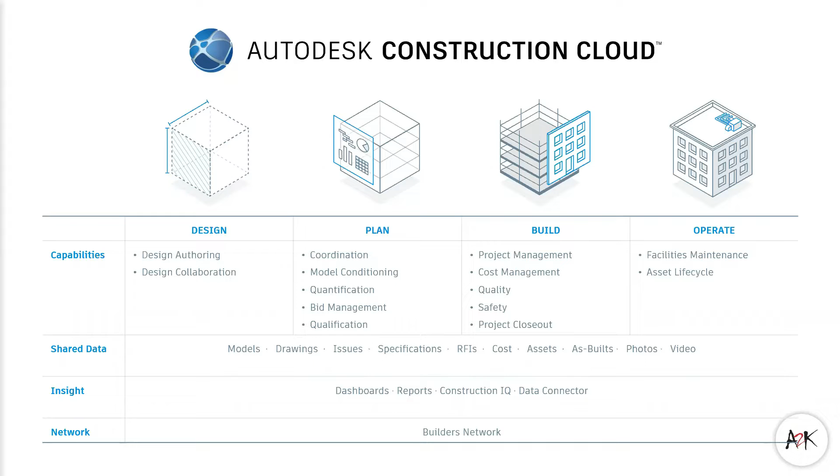Okay, so if we start talking about design collaboration and authoring, I want to touch on how design collaboration has been evolving, particularly as it pertains to Revit workflows. Initially, we started off with having Revit central models in our company shared drives, and users would just tap into that central model and work away. So they'd have one shared drive, the Revit central model was in that shared drive, and you'd have user 1, 2, and 3 tapping into that localized central model.

The problem with that was the limited amount of collaboration you had if you couldn't actually be in the office, or if you had to work with external consultants on bigger projects because you couldn't invite them into your shared drives, right?

Not only that, you had your daily manual BIM management tasks that could be automated if you had more of a collaborative platform. And there was also no internal activity tracking. You couldn't see what anyone was up to, and you didn't know when changes were happening in real time.

But then there was an evolution of what we call the Revit servers, where users could connect to a server within an organization that hosted Revit central models. So for larger organizations, this extended to multiple different servers across regions. So if you had a company that had different offices in different parts of Australia, you probably might have a different server for each office.

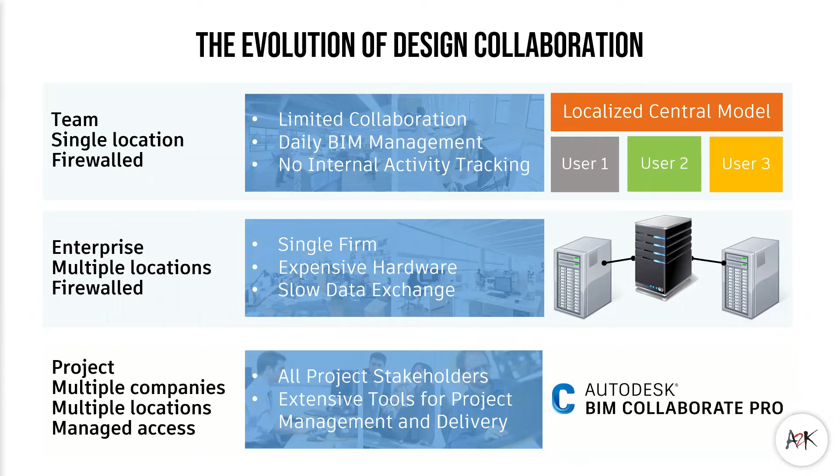And here's an extra slide for any of you who are around in the older days. There was a product available called BIM 360 Design, part of the BIM 360 portfolio of products. So this product actually allowed you to access the BIM 360 environment and use modules such as Revit Cloud Work Sharing, Collaboration for Civil 3D and Plant 3D, and BIM 360 Docs.

So this new product, the Autodesk BIM Collaborate Pro, is its successor, and it sits in the Autodesk Construction Cloud environment. So this new environment provides extra functionality such as clash detection, insight, and what we call Autodesk Docs now instead of BIM 360 Docs.

Please bear in mind, this is a unified platform, the Autodesk Construction Cloud, which means that your older BIM 360 projects and your new Autodesk Construction Cloud projects all sit in the same place, so it's nice and easy. I will show a visual example of this in the demo section of this webinar so that it makes a little bit more sense.

Again, just to summarize, BIM Collaborate Pro is the evolution of the older BIM 360 Design and sits on the Autodesk Construction Cloud platform, which gives it additional functionality. Also, if you have AEC collections, you actually now have access to Autodesk Docs within the Autodesk Construction Cloud, at least from a document management standpoint.

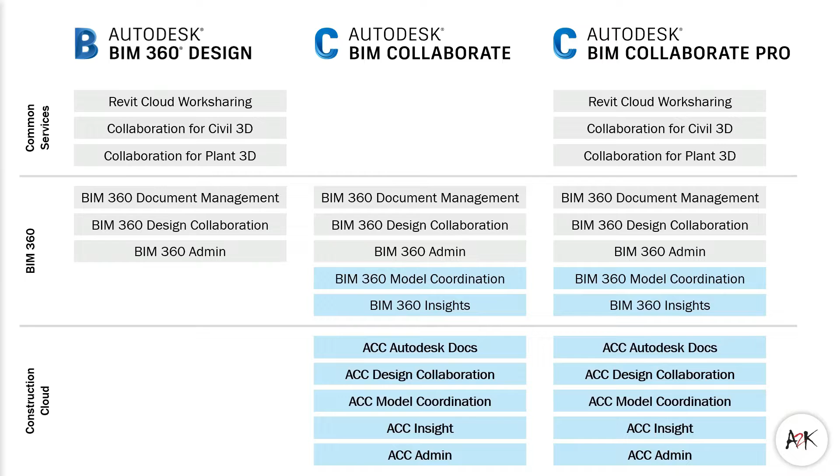Okay, just one more visual representation of what we're talking about, and it gives you a really good idea of what type of licensing you should have depending on you and your team's role.

So, basically, if you're a designer who's part of the design authoring process, then you need BIM Collaborate Pro. If you're just someone who's a reviewer, then perhaps the Autodesk BIM Collaborate license or Autodesk Docs will suit you just fine. Regardless, they're all connected within the Autodesk Construction Cloud platform.

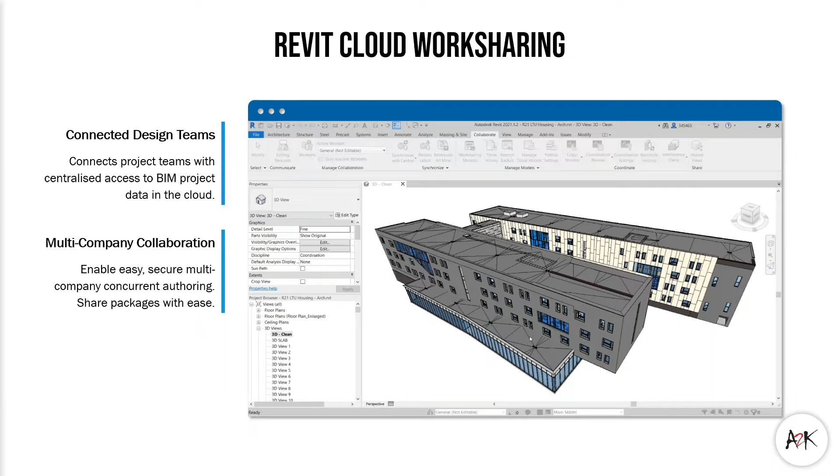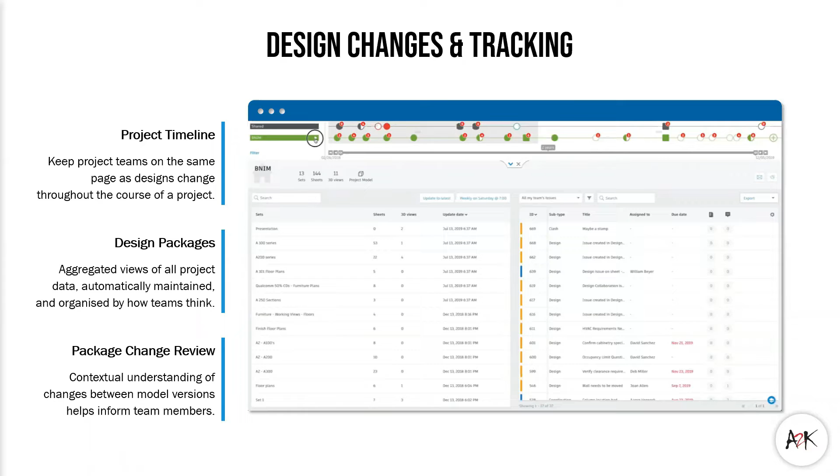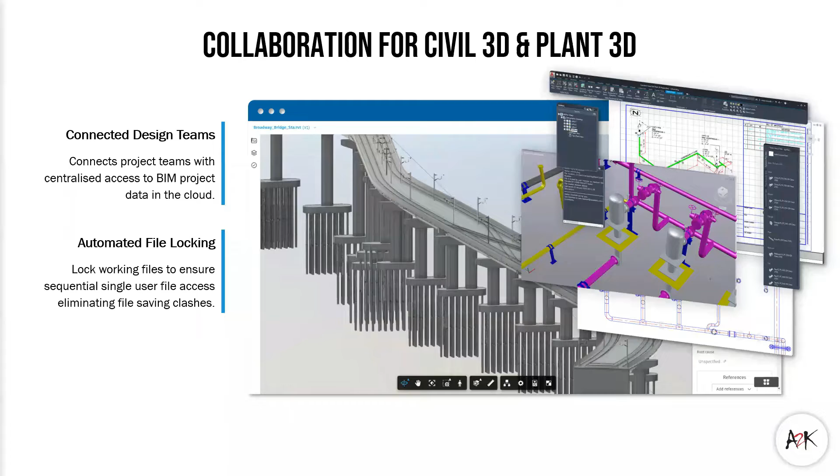Just so everyone's aware, there are collaboration options available for Civil 3D and Plant 3D within the Autodesk Construction Cloud. It's not just for Revit. We have done a webinar on how Civil 3D integrates with the Autodesk Construction Cloud and how that work sharing aspect comes together. So you can go on YouTube and check that out if you're interested in learning more, or get in touch with us at the end of this webinar.

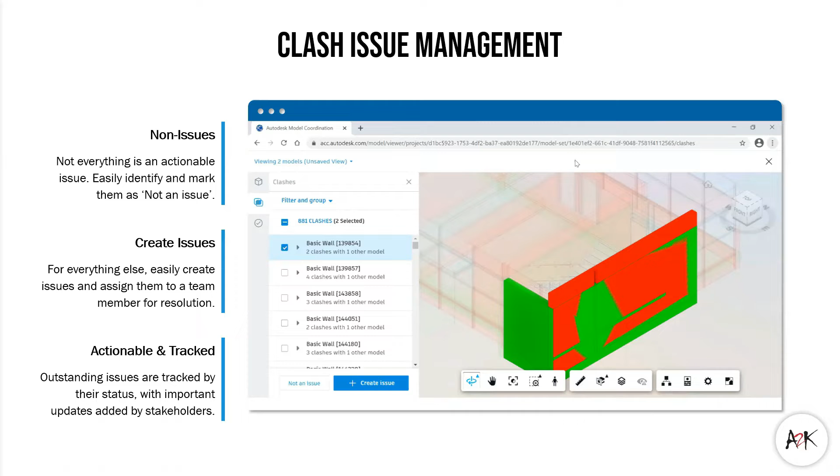Okay, cool. So now we can get into a live demonstration.

So I'm just going to bring up my Autodesk Construction Cloud environment. You can just use a web browser. This is a splash page for the Autodesk Construction Cloud, and over here you can see a list of all the different projects that I have access to. If you're an account admin, you'll have access to the Create Project button and also the Account Administration button over here. If you're not an account admin, you'll need to get in touch with your reseller or Autodesk to make sure it's all set up correctly for you.

So from here, the first thing we want to do when setting up a project in the Autodesk Construction Cloud is click on Create Project over here on the left-hand side. From here we can enter our project name, so I might say ABC for BIM Managers, let's say that's the project name. You can give it a project number and select the account of where this project needs to be hosted. For me it's going to be A2K Technologies, that's the hub I want this project hosted in.

And then you would go ahead and say, yep, what project type? You can select from any one of these options. It doesn't really matter too much, but for us right now we can just say multi-family housing.

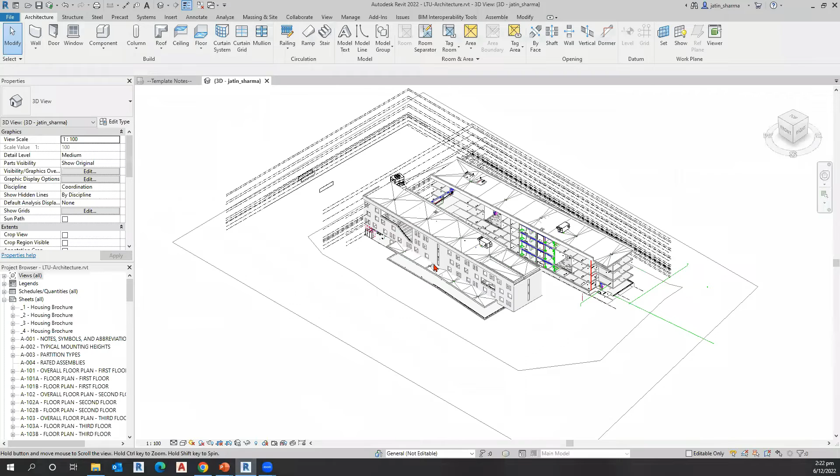So how do we set one up and put it into the cloud environment? The first thing that you do, obviously, is go to my Revit platform. I've got an example project here, but we'll use a new one from scratch so that you can understand what the process looks like. Just a quick note, I would recommend that you download a particular app called the Autodesk Desktop Connector. If you download it, it actually links the desktop environment to the cloud environment, and what it lets you do is, if I click on the home button in my Revit, I can actually utilize the plugin called Autodesk Docs.

So I can actually access the project and open up the model if I wanted to straight from my Revit environment, without needing to do any manual upload and download process. That's the benefit of the Autodesk Construction Cloud, right? So again, the app is called the Autodesk Desktop Connector.

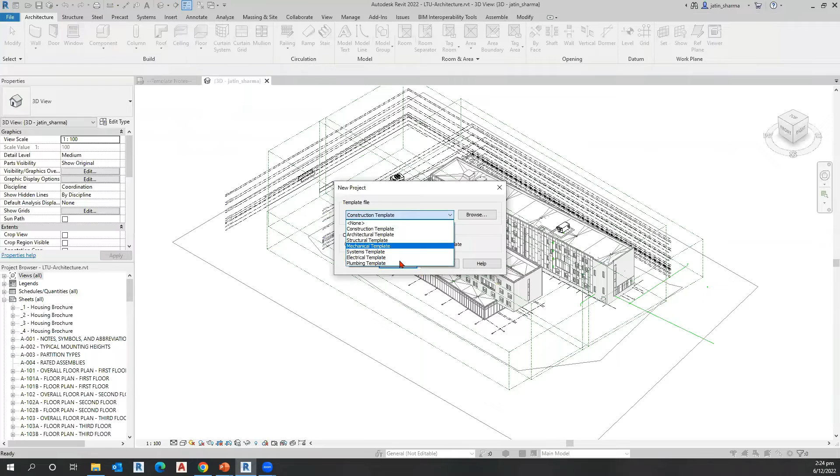Okay, so we've set up our folders and we've got a Revit model. So how do we put this into the cloud? If I start up a new project, so go new project, new Revit project, I'll just use the architectural template.

And let's say I'll draw some walls, and maybe I'll draw a floor if I wanted to as well. Okay, I've got a floor and a couple of walls. So let's say this is my project and I want to bring this into the cloud environment.

Well, how do I do that? So the first thing you have to do is what I would recommend, save a local copy into your drive first of all. So you just go to the save button and just save this project into your local desktop environment. From there, you would go up here to the Collaborate tab, and then you have an option on the left-hand side called Collaborate.

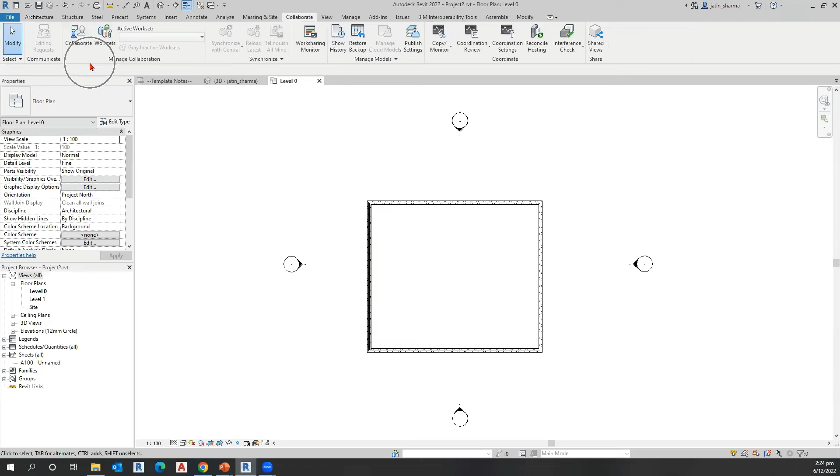Now, if you want to, at this point, you can also check your publish settings so that you do have something to work with from a publishing standpoint. If you're not sure of what publishing means or what publish setting means, we can go through that in more detail in training, or you can get in touch with us.

But the idea is you're choosing what things you actually want to publish into the cloud environment other than just a model. So if you want to be publishing views, if you want to be publishing the 3D view or a sheet, you can do so under this publish settings here. Okay, so I might just choose a couple and I'll just go save and close.

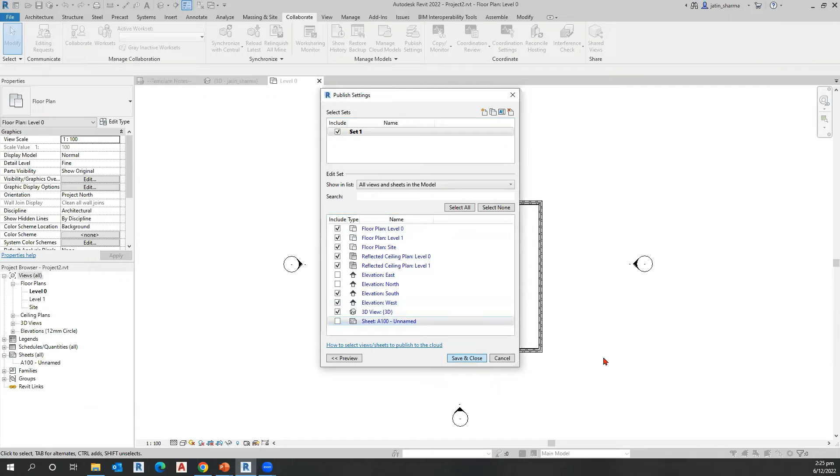Once you've checked your publish settings and you've got that up and running, the next thing to do is to click on this collaborate button at the top here. Okay, then it says, hey, you haven't saved the model. It's okay, we can quickly save it. And then it gives you a little prompt.

And it says, hey, you're about to enable collaboration. This will allow multiple people to work on the same Revit model at the same time. How would you like to collaborate? Like I say, in the past, it used to be within your network, so collaborating in a local server or a local shared drive. But now, if you buy BIM Collaborate Pro, you've got the option to set up this Revit model in the cloud.

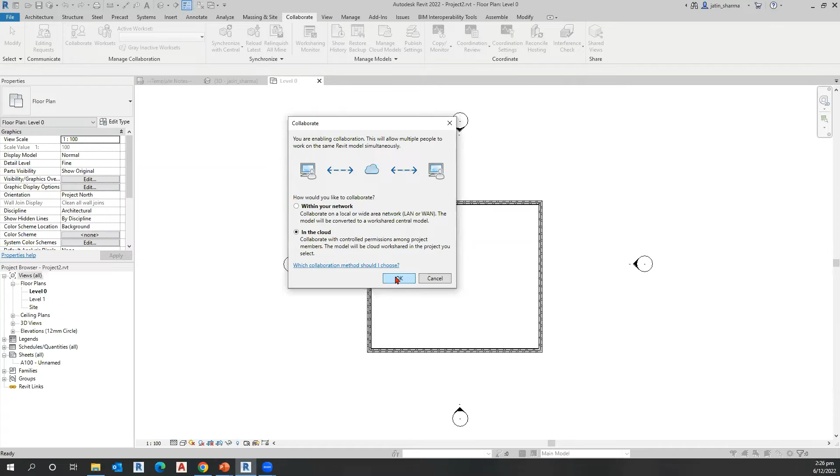Okay, so from here, we can say, okay, yep, I want to put it into the cloud environment. And then it says, okay, great. If you want to save it into the cloud environment, it's going to give me a prompt in a couple seconds to say, well, what project are you referring to?

And so from there, all we would do, so I'm just going to change account to my A2K Technologies account. And you can see here, it's gone to my project and I can go project files. I'm actually changed to the demo project so that you can see the list of all of the folders.

So all the folders you're seeing here are the folders you're seeing in the cloud environment as well. Make sure you download the Autodesk Desktop Connector so this is all replicated nice and easily. From there, you would just select the folder. For us, it would be work in progress under architecture, maybe under Revit model.

That's the first thing you have to do, which is creating the Revit Central model in this cloud environment. Now what some users do by accident is they'll open up Windows Explorer and just do a simple drag and drop. I've got a pool house model here, and I might just do a drag and drop and put it straight into the cloud environment.

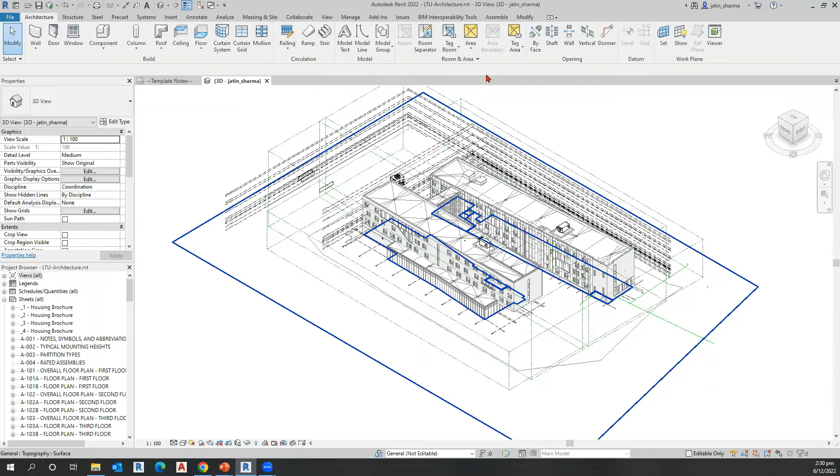This is actually coming from - if I go to the published settings of my LTU architectural model - that's my one set, which is coordination, which is just one view. And I've got a preliminary set as well, which has got quite a few different number of sheets. Because these published settings are appropriate and I've set this up, those names are being replicated back in here.

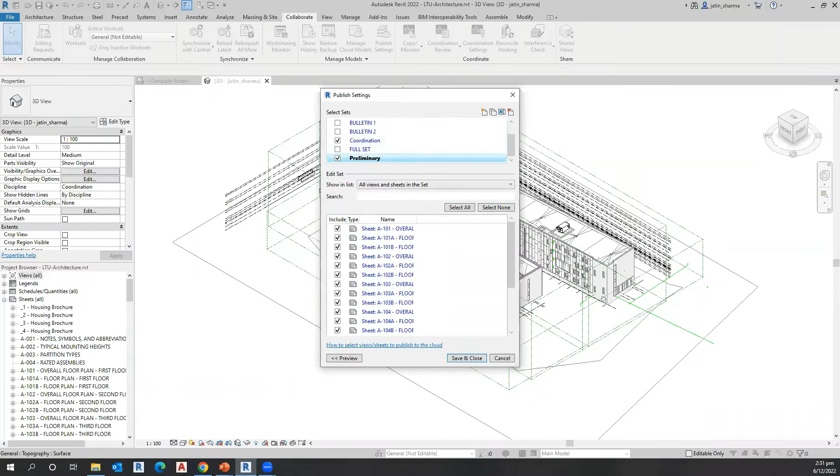And they're saying, well, in the preliminary set there's about 40 sheets, and in the coordination set there's a couple of 3D views. So this is where we talk about how you can have this optimized so that you're only sharing what you want to share with your other consultants. You don't have to share the entire model.

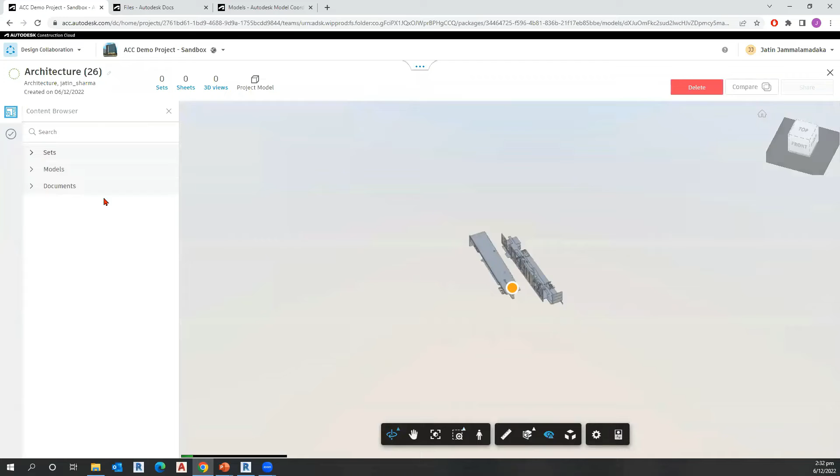When I click on this icon, it's going to give me a quick preview of my model. I can choose what I actually want to share, whether it's a set, whether it's the entire model, or whether it's any additional documentation. So I might choose a particular set, like the preliminary set, and I can save this as a package for other teams to review and link into their own Revit environment.

So what would typically happen is you select what you want, hit the save button, and when you're happy with that, you would go ahead and share that package. Oh, actually that's a duplicate package, maybe we'll try something else, but either way, you would share the package.

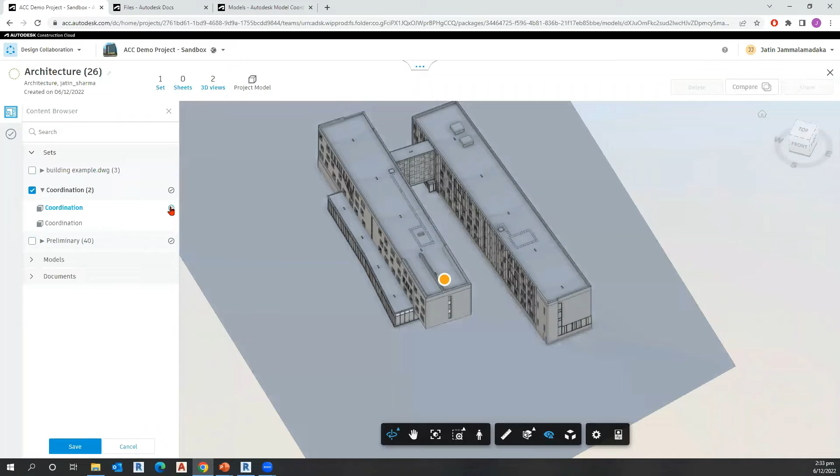Once you share the package, it becomes available for the other disciplines to review. When you share this package, a copy of that file gets placed under the shared folder here, under the discipline folder. What some people do is go into shared and link whatever model is there back in the Revit environment.

That's not the best workflow. The reason why is because if it's linked this way, you're not utilizing the platform to its fullest capabilities, because whatever changes the other disciplines are making, yes, you'll be able to see it right away. However, one of the really powerful functionalities within Design Collaboration is being able to compare the different times people are sharing their packages.

So let's say I was part of the structure team, and I know architecture have tried to share a package on this date. I can use this compare button. I might choose this one here, which is a Revit model. Because I haven't linked my model with shared under this shared folder, I can click on this compare button and visualize the changes between the latest version.

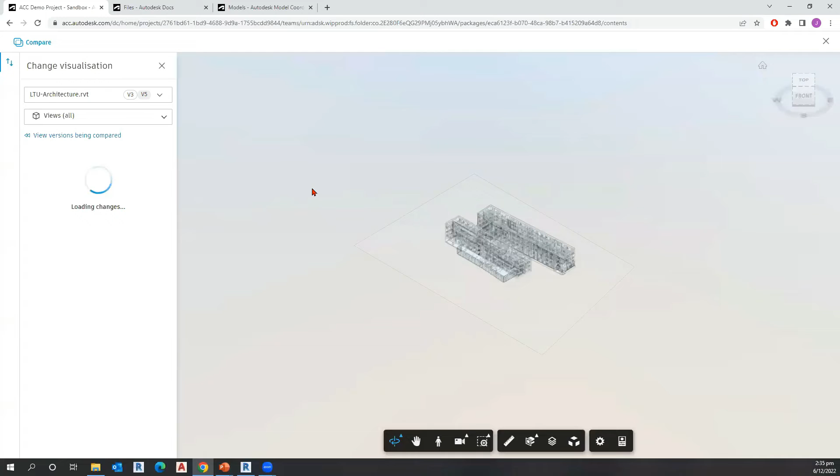Now we can go to show changes, and we can visualize what the changes are between the last time the architecture team has shared and this time. You can take a look at what's been added, what's been deleted, what's been modified, and where those modifications have occurred.

There's another cool feature called Watch Changes, where you can pick what parts of the model you're interested in, and it will only tell you if there's been a change to those parts of the model. For example, I might only be interested in walls and floors, and it's only going to show me those changes if there was a change that occurred. This is a very, very powerful tool.

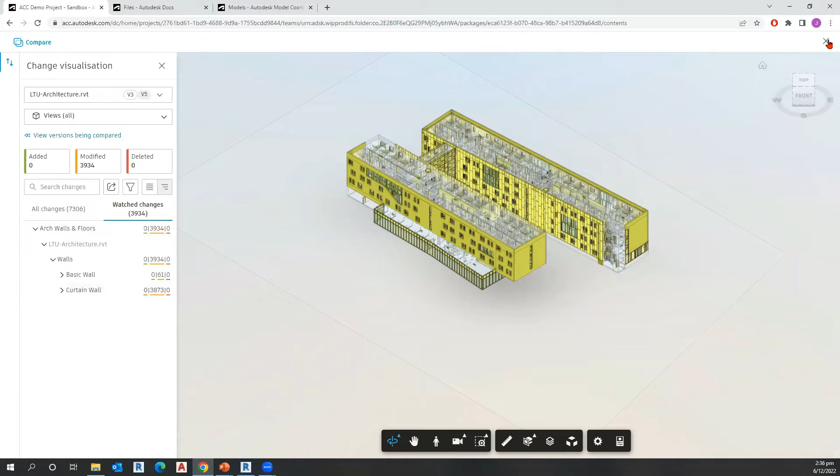So once you take a look at that package and you're happy with everything, you can use the consume button. When you use this consume button, a copy of this model that's currently in shared gets put back into your own container folder under consumed. That is what you use to link in your Revit environment.

As an example, let's say the services team have shared a model, and I've consumed it. A copy of this LTU services ends up in my own architecture consumed environment under services, and there's a copy of that Revit model here. That is what I use to link into my own Revit environment.

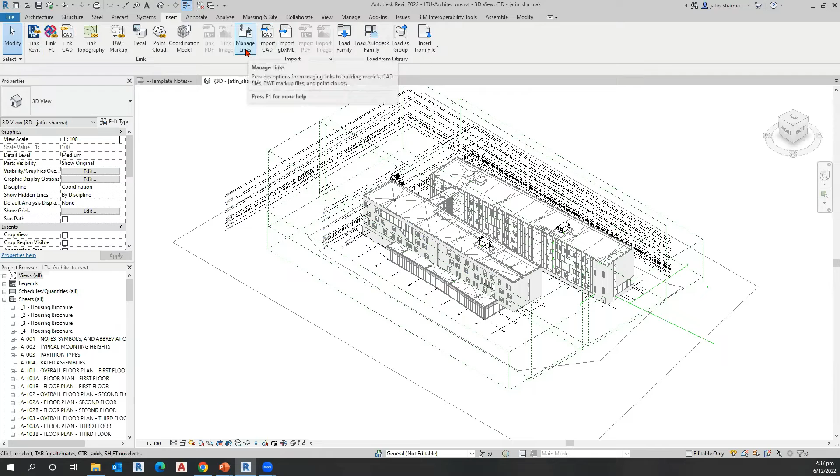So when the change happens and I'm happy with that change and I consume it, bring it into my own environment, then my Revit model will automatically update. You can just use Insert, Manage Links, Link Revit for that. The idea is you're just grabbing the model from the cloud rather than a shared drive, like here I've got LTU services that's been linked from the cloud environment.

Okay, so that's a quick overview of design collaboration, moving models throughout the system. That's why it's very important that you set up these folders and subfolders appropriately.

So once you have design collaboration set up and working fine, you can set up what we call a coordination space. You tell Autodesk Construction Cloud to go into any particular folder and conduct live clash detection for all the different models being uploaded into that folder. We'd recommend choosing something like shared or published, because that's where models are automatically copied across, so live clash detection happens as soon as someone updates something.

To access that feature, you go up to the top here to docs, and then into model coordination. That's the live clash detection within the cloud environment.

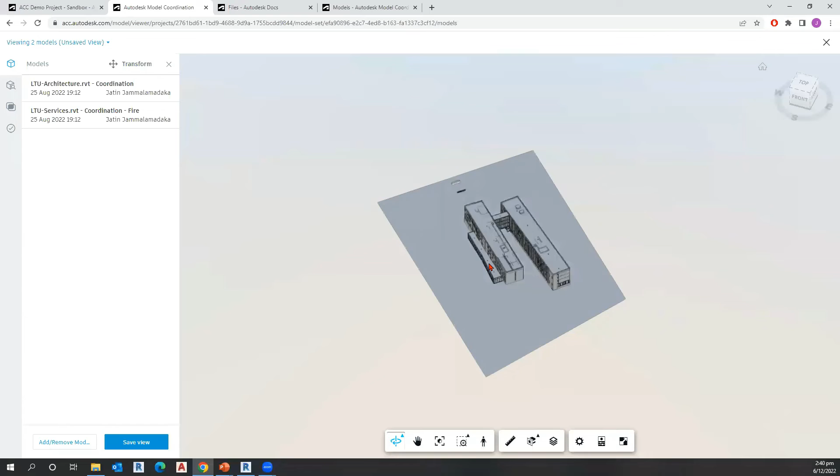And it's now going to show me the automated clash detection results. This is the view here. I can hit save view so that it's accessible again and again.

And if I want to take a look at the clashes, I can click on the clash button, and it's going to give me all the different clashes currently happening. I can group it by multiple different ways. By object is the default, but you've got multiple different ways to group the different clashes.

You can now go through this clash detection process either within a range, above a value, or below a value. And you can do it in inches and millimeters as well.

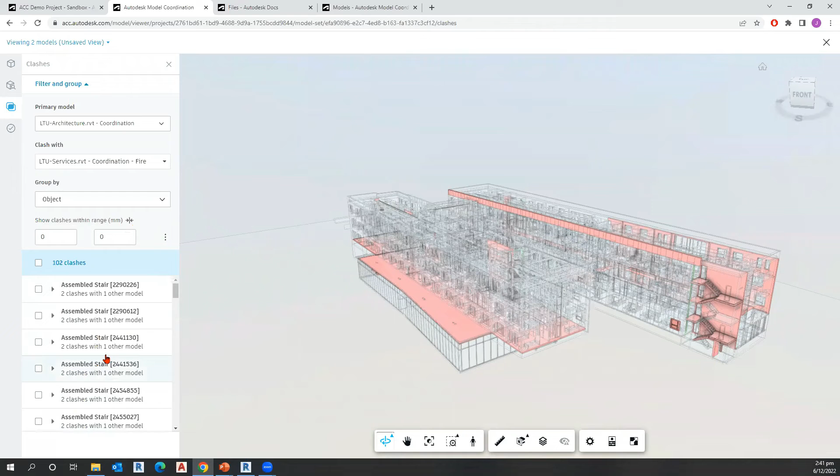If you want to take a closer look at any of these clashes, for example, I might want to take a look at this assembled stair, I can see there's a clash happening over here. Similarly, I might say, what's happening with this basic wall? And I can take a look at that visualization here.

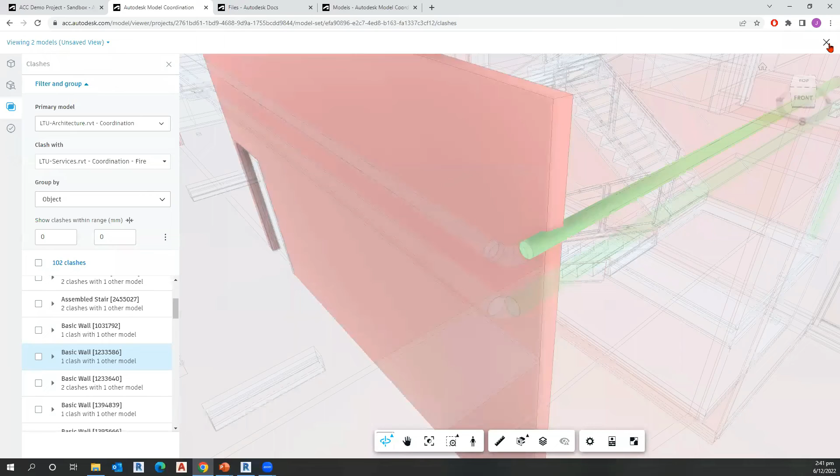And if I ever wanted to access this again, I'd save that view, so under my views I've got it available. But the key thing here is that you can make it available to everyone within your team and not just yourself. This is how you can make it easier for everyone that's on board.

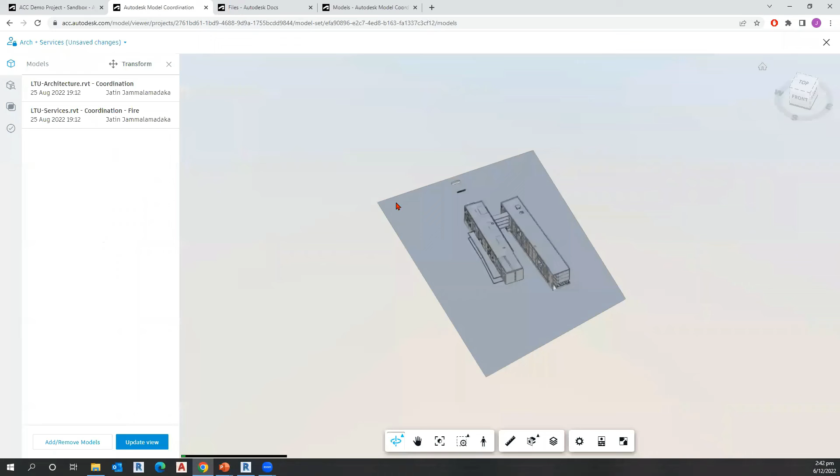So if we go Arch and Services, it's going to go into that particular view, and then they can just go into the clashes. From here, you can select the different clash issues that you want to assign to the different project teams.

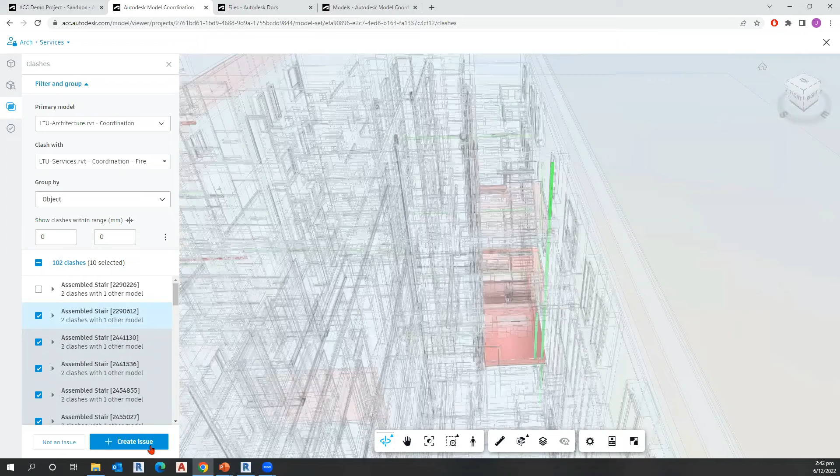Let's say, for example, I want to take all these stair issues, create an issue and assign it to perhaps the architectural team. So I might go create issue, place a pin for where I want them to take a look at, and it's going to go ahead and create that issue for me.

Once that issue has been created, we can give it a title and change the type of issue it is. By default, it'll come through as a clash issue because we're doing it from model coordination. We can give it a description, then say who it's assigned to, whether it's a user, a role, a company, whoever needs to solve the issue. You can also give it a due date and start date.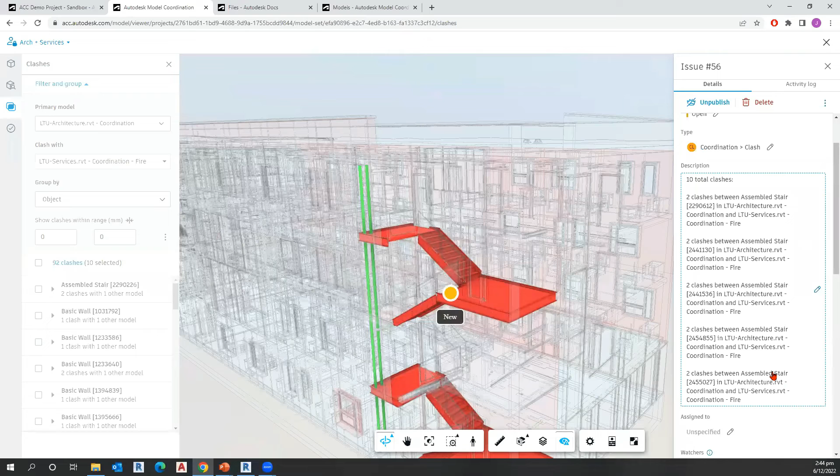One of the new features just released in the November update is the ability to create issue templates. So this area with descriptions and due dates, etc., you can create issue templates. When creating an issue, you choose the template and all of this will be pre-populated for you so you're not rewriting descriptions over and over again.

It also gives us an activity log of when the issue was created, who's assigned to it, who's working on it, etc.

One of the things you can also do within this platform is create automated reports so that for all these different issues you're creating, you can send weekly reports to different companies or disciplines saying here's a list of outstanding issues. You can even link it to BIM coordination meetings, conducting them within this platform - creating a meeting, assigning issues to people or disciplines, and creating follow-ups.

As you go through the project, at any point if you want to upgrade from Revit - say the project is in Revit 2021 and you want to upgrade to Revit 2022 - but don't want to manually go through that process, you can do that in the cloud as well. You go into settings, and there's an option called Revit Cloud Model Upgrade.